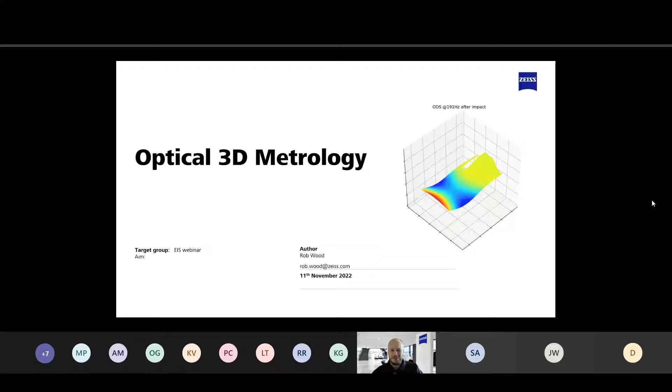Over to you, Rob. Thanks Dave. So, thanks for the introduction. My name is Rob Wood and I work for Zeiss. You may know me from GOM previously. GOM is a company that was taken over by Zeiss in 2019. But as of the 1st of October this year, everything in the UK is now under the banner of Zeiss UK. Apologies in advance, you will see a little bit of a mix match of slides. We're starting off with a Zeiss slide, but very soon we'll go into some GOM slides as well. But we'll come back to Zeiss at the end too.

So initially I want to start with a question we quite often get asked: what kind of measuring data can digital image correlation provide for vibration analysis? That's hopefully what we're going to answer today. Before we get there though, we'll take a step back. For those of you that don't know what digital image correlation is, we'll introduce this. Digital image correlation is one of two techniques that our Aramis optical 3D sensor uses.

You see on the right-hand side a pair of cameras with a stochastic or random pattern that's followed for digital image correlation. We also do some point tracking as well through triangulation. I guess the best way of showing it is to start a video, because it'll show one of the systems in action for some more standard applications.

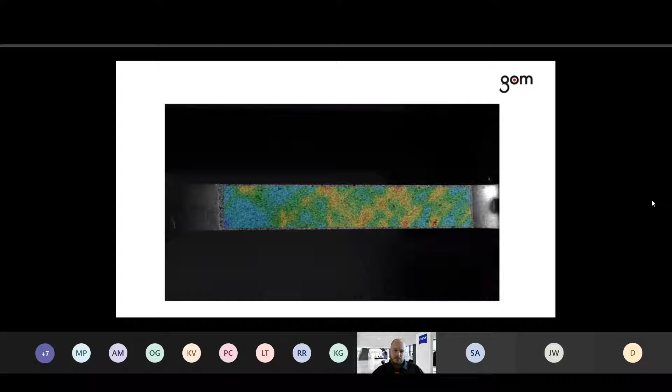So we're going to start off with a materials test, so a tensile test. You see the sensor mounted to the test machine, and when the test machine is started, the camera system automatically starts recording. We've got two cameras with an angle between them and a central blue light projector providing illumination, and that speckle pattern you see on the surface is key. Essentially, we're splitting that speckle pattern into very small measuring facets, or small squares, that we're going to track

through 3D space as the measurement proceeds. This allows us, for example, to look at some flow fronts of strain through the material in the initial stages, and then ultimately look at the failure and necking behavior up to hundreds of percent. In the color plot here, we're looking at full field strain.

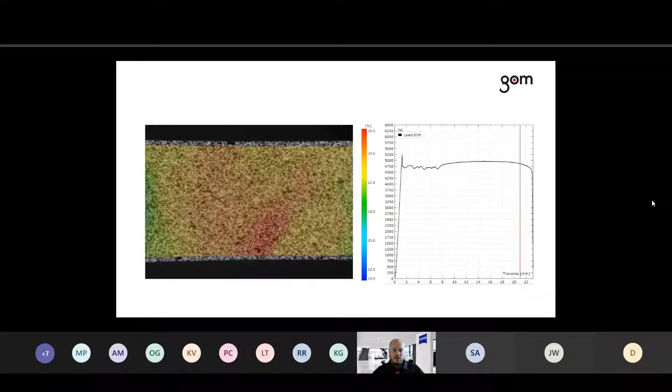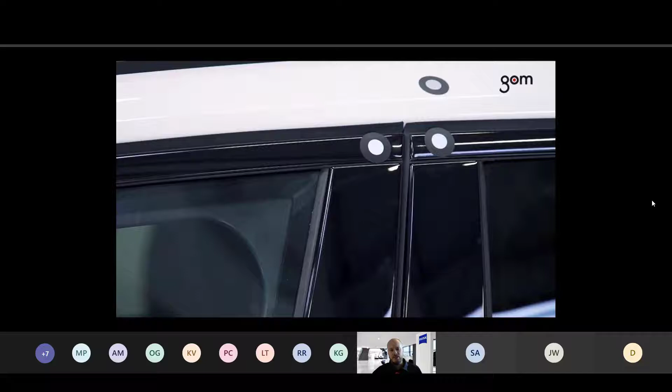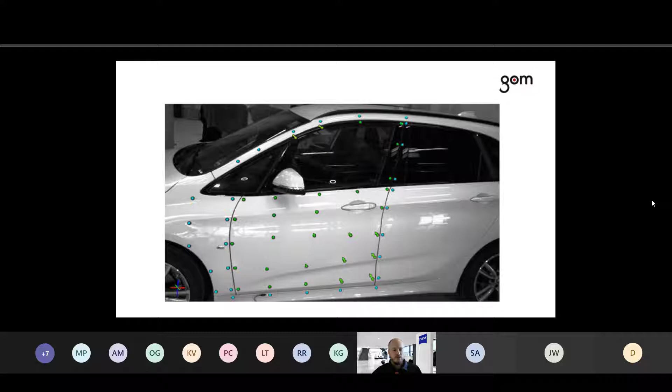That can be scaled up though, being optical. Two cameras, we can change the lenses, distance between the cameras, and the standoff distance, and in this case record at a higher frequency to look at, for example, a door slam test. Here we're looking at how the door performs in an over-slam situation. We're going to come back to look at the door slam in a little more detail later.

Everything we do typically is based on digital image processing, so we're using cameras. Therefore, the measurement accuracy relies on there being a contrast of information, some nice illumination, a good grey value distribution, and good light intensity as well. And that's based on two principles.

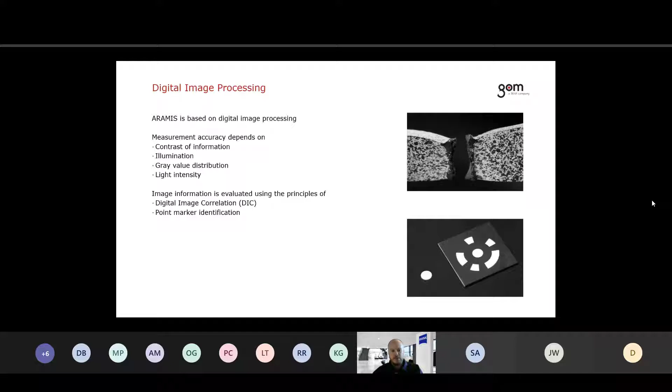So the first measuring principle is this digital image correlation that uses the speckle pattern. I talked about those facets - you can see those here in the picture. The facet is tracked from the top image to the bottom, and you can see in simply 2D here how the facet is twisting and changing shape. So we're tracking that to create the displacement or the deformation of the sample.

The other method uses these discrete circular markers that you've seen on the door slam example, and here we're looking at the contrast between the white and black marker points and using that to pinpoint the center of the point. This allows us, for all sorts of different tests, to generate essentially 3D surface coordinates, and from that we have a reference or zero image, and then we can get 3D displacements, velocities and accelerations back to that, also vibration, which we're going to talk about today, and the surface strains such as you

see in the video. The systems you've seen in the video are standard Aramis systems where we're providing all of the hardware. Typically those will go up to 1,000, maybe 2,000 frames per second. So good for slow speed and some levels of vibration testing.

Where we need to go faster, we would typically have a camera system such as this. So again, still two cameras, but two high-speed video cameras, in this case from Photron, and there's just an additional light because you need more illumination for these sorts of measurements.

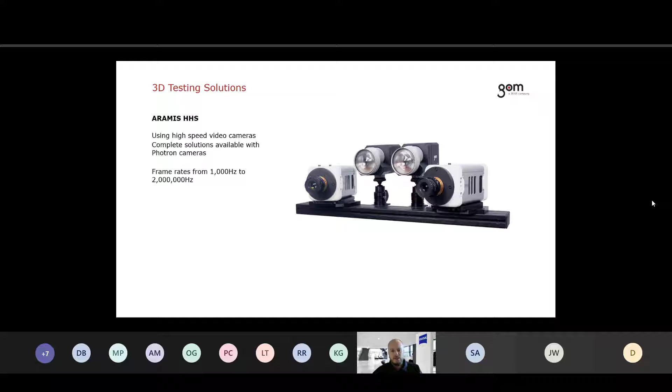So the techniques of digital image correlation as well as vibration, which we're going to talk about today, are widely used. Many different materials, many different geometries, often standardized ISO tests as well can be incorporated. So that's on the material side, and also on the testing of structures and components as well. There really are no limits to where the technology can be used.

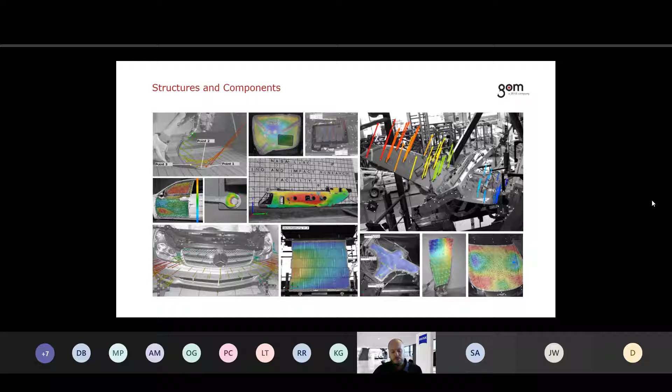And of course, one of those areas is vibration. So today I want to run through a few different applications. The first one is harmonic excitation.

So here we have a polymer component which is on a shaker table, and the system is giving us the displacements that are shown here in this video. The color is showing the magnitude, and in the graph we've extracted data from 2 points on the surface to give this time trace on the right-hand side.

So the test essentially is to validate the calculated mode shapes. Very quickly there you can see the benefit is that we actually get to see how big the displacements are in millimeters.

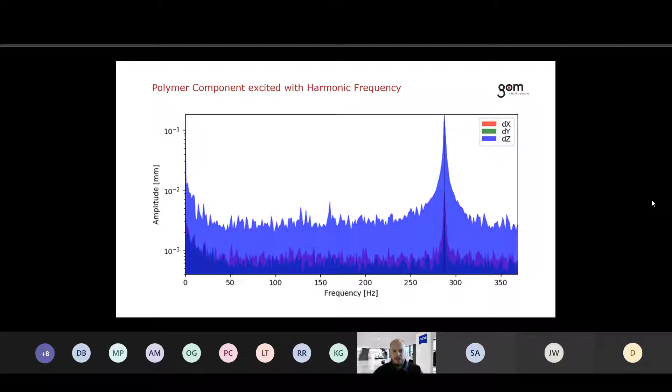So we can extract those 2 points and the displacement in all 3 spatial directions, X, Y, Z in this instance, and then turn that into a frequency response curve, again in all 3 directions. Clearly here we can see a peak at around 287 Hertz, which was also predicted in the simulation, and the amplitude here is about 1/10 of a millimeter at this frequency. From that we can visualize the mode shape as well.

Next example is an impact-based event, the door slam test we looked at briefly earlier, but this time we've applied the speckle pattern across the door itself and the window. We've used the marker points around the edge and the chassis, which gives us our rigid body motion, so we're taking out that twist and roll of the vehicle and just looking at how the door behaves against the chassis. It's a really common test in the automotive industry, used for functionality of the door lock system and seals, and essentially it's a misuse test for the overslam.

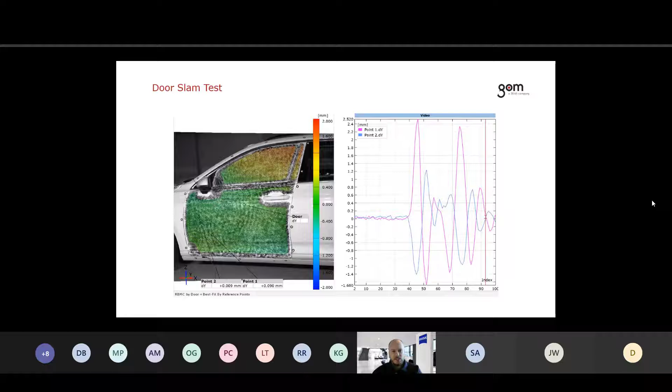That speckle pattern applied across the door gives us very high spatial resolution, full field data points to choose from. On the left hand side we've extracted 2 points, and in the time history plot we've got those displacements in the Y direction, the closing direction into the screen. Again, we can plot displacements in all directions and calculate our frequency response curve and the corresponding mode shapes at the different peaks, starting off and working our way through the different mode shapes and frequencies.

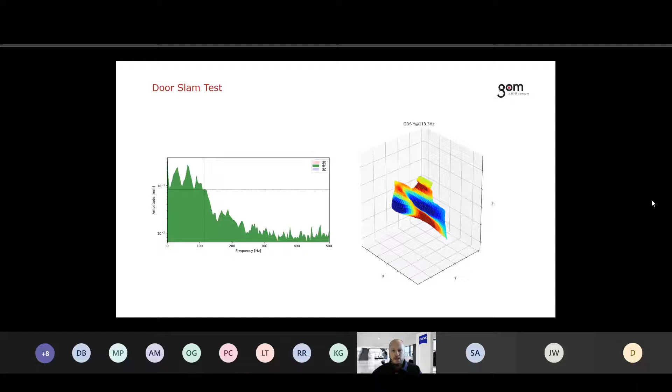Another application we want to look at is a rotating component. Here we see a cooling fan from a truck, and non-contact sensors are ideal for rotating objects. You see the ARAMIS system with its blue ring lights in the background. We're capturing images at 1,000 frames per second, and the ARAMIS system is able to calculate the position of the rotating cooling fan, creating components to track representing the complete component, the hub in the middle and each of the individual blades.

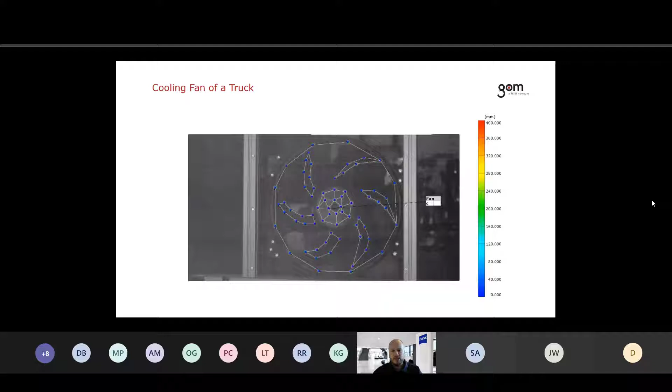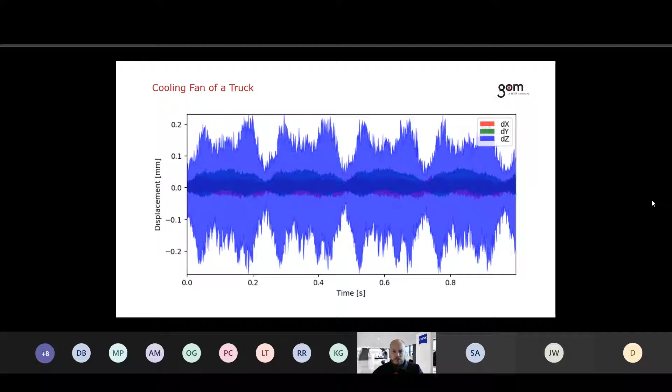This would be a typical video showing the displacement. We can take that relative to the hub as well, so we can really start to look at how the blades are fluttering. Again, we can extract the deformation in all 3 directions, calculate the frequency response, and look at the mode shapes. In these examples, you see an in-plane rotational deformation on the center image, and on the right-hand image you see that out-of-plane deformation, really showing the wobbling of the blades.

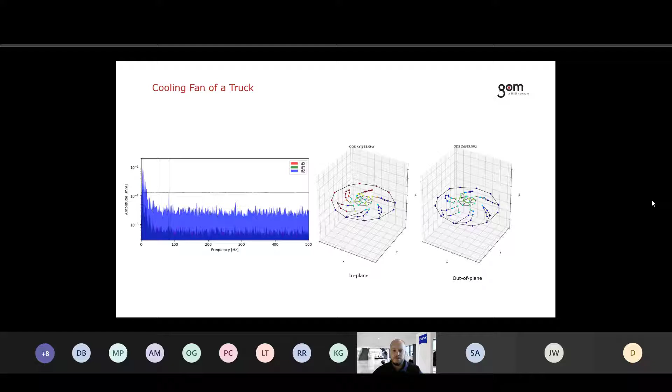So how did we get from the start to that? Looking at the process within the ARAMIS system, first of all you need to set up the system and apply some points. Points are typically easier to apply on structured parts, or sensitive parts where adding additional mass would be damaging, so you can quickly put on sticker points such as you see in the image. The full field speckle pattern can also be applied through spray paint, giving better accuracy but also higher data density.

You then need to choose which frequency you're going to measure with the cameras. Obviously you need to go at least 2 times the maximum frequency. Typically for dynamic events, we would be recording at 10 times that frequency. With a simple harmonic excitation, such as in the first example, we could do some subsampling here, so we don't need to record as fast. In some situations, we can stagger that recording process to build up, assuming it's a harmonic excitation.

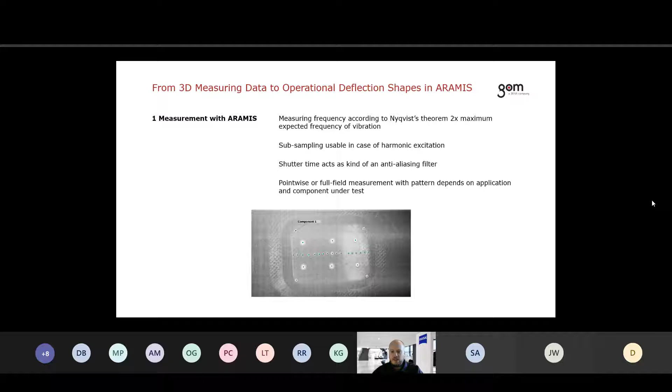Once we've set up the system, we need to acquire some images, and then essentially most of it is typically done in post-processing. We create this so-called point component or surface component, depending on whether we're using points or the complete speckle pattern. We can transform the measuring data into a defined coordinate system to define our X, Y, Z directions, apply any rigid body motion compensation, such as the roll of the chassis shown in the door example, and then check for displacements.

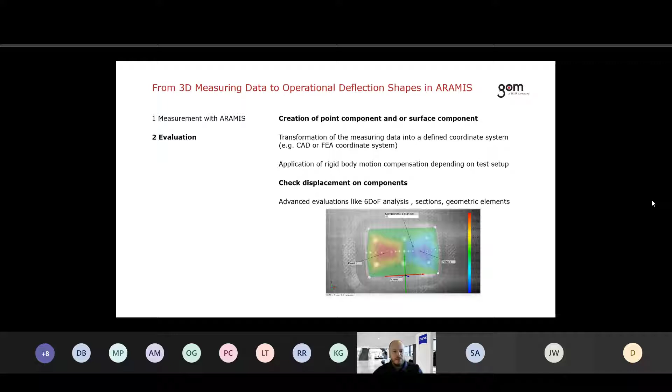There's obviously lots of other analysis that can be done, such as 6-degree of freedom analysis as well. At that point, essentially we're finished with how far we take the measurement within our software.

At this point we would export typically a UFF file. This would contain the signal, the geometry, mesh, surface - all of the information - into this common, as the title suggests, universal file format. This universal file format is supported by many vibrational analysis tools that many of you will be using already.

We've got documentation and workflow available on how to link this to ME'Scope, BK Connect, and PAK and NumPy as well. Another example of the different software that's supported is Siemens Test Lab. That's a nice throw forward into the webinar a week on Tuesday on the 22nd from Siemens - if you're interested in the vibrational analysis side, please register for that event.

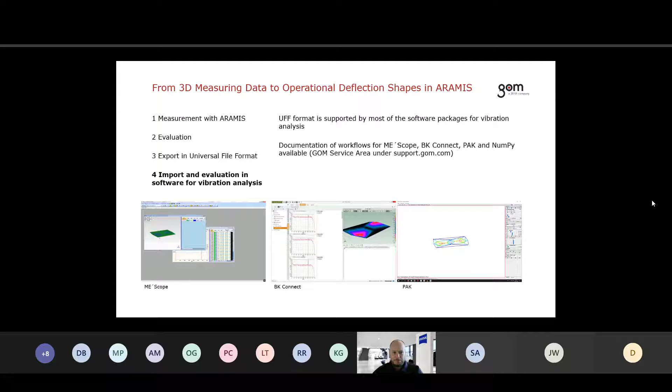Okay, another couple of examples with some nice videos. This is turbine fan blade inspection using the Aramis system. Typically this is used in aircraft maintenance, repair and overhaul, or MRO, where we're looking for cracks in these large fan blades from the jet engine.

If you have cracks that are already initiated, the natural frequencies of the component will change. So by doing this non-destructive test at the beginning of its life and during service, you can identify the possible determination of cracks or maybe other internal problems or faults.

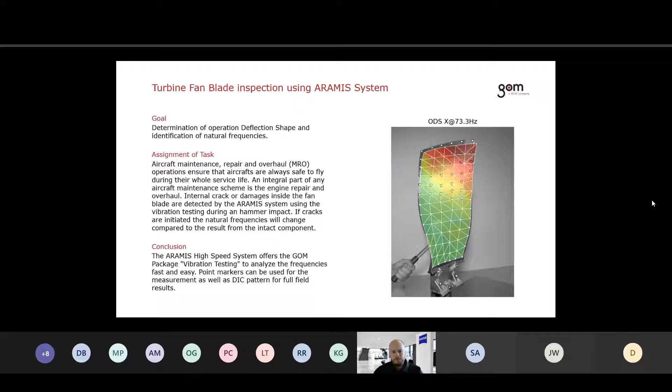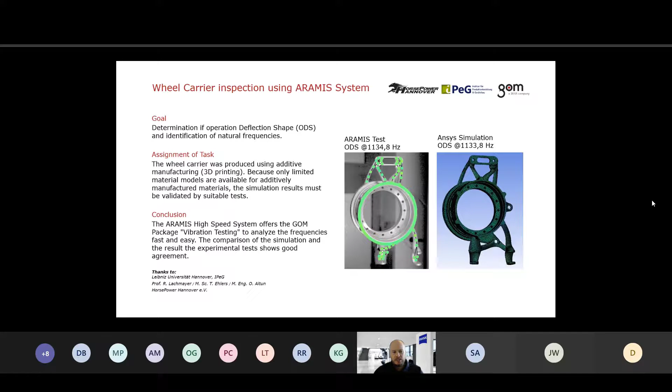The next example here is looking at a 3D metal printed part, and with these sorts of materials and production processes, there's not too much widely available material and proven simulations. So here we're using the results from the Aramis to validate our ANSYS simulation for the mode shape calculations.

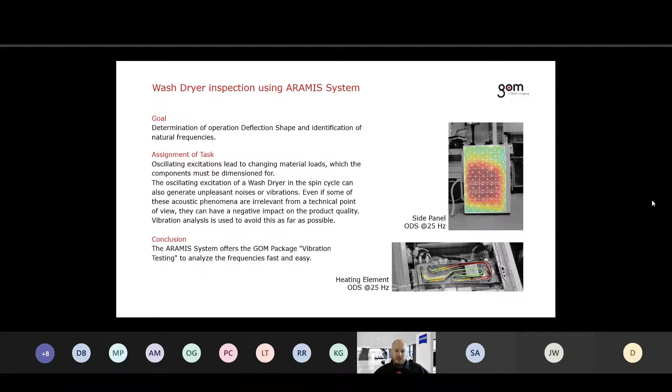And the final example, hopefully many people can relate to, is just a simple washing machine. There's various things to consider - during the spin cycle, the washing machine is going to generate potentially unpleasant noises or vibrations, which we don't want. From an NVH point of view it's very important to understand, but also from a product quality point of view, since we need to understand how these vibrations can impact the overall quality of the machine. You see the two examples here with the side panel vibration and the heating vibration.

Okay, hopefully you've seen many examples and benefits of optical 3D metrology for vibration analysis. To sum up, basically it is a non-contact measuring principle. In terms of setup, there's no wiring needed such as with accelerometers, so it's really fast to set up and calibrate the sensor - we're reducing it down to minutes, where typically on a large test you could be working for days or even weeks to set up accelerometers.

The markers themselves are very lightweight, so suitable for applications where you don't want to add mass to the structure, but they're also durable, so the same sensor and measurement points can be used again and again for many different tests. Clearly the amount of data you can get is quite large.

Even with the marker points, you can stick hundreds of marker points on, and with the full field speckle pattern you're getting thousands of points. Importantly, each of those points is a 3D displacement - so if we're putting one sticker down, you're getting the equivalent of a triax accelerometer.

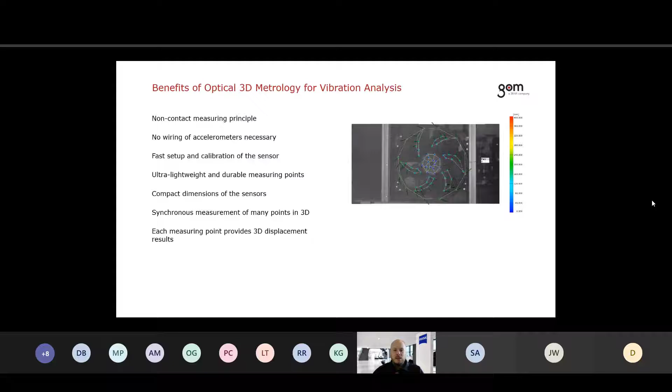We've also seen some applications of rotating components, much simpler here because we've not got any wiring. Other things to consider around the whole test is that we can actually measure the excitation as well. We didn't see any examples of this, but if the excitation is in the field of view that the cameras can see, we can put marker points on it to measure it, or we can bring in analog signals from the excitation source and sync that up with the measurement data we're collecting.

All of this can be done in real time as well to provide real-time digital outputs of the displacement. And finally, as we've seen in that final example, validation of FEA is another area where this can be applied - we've got techniques for bringing FEA into the software and doing a real direct comparison.

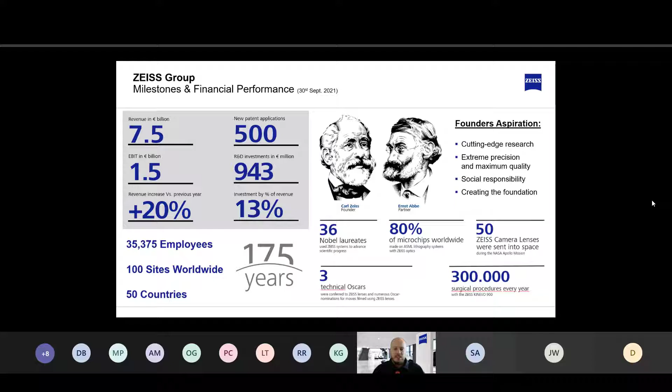It's been around for 175 years, founded by Carl Zeiss and his business partner Ernst Abbe. Really, their aspiration of cutting-edge research, extreme precision and maximum quality still exists within the foundation they've created today. So today, it's split across 4 main segments.

I admit I didn't know some of these applications when I started with Zeiss, but the first one there is semiconductor manufacturing technology. So 80% of microchips worldwide, from your phone to your car, are all manufactured using an ASML lithography technique, which relies on Zeiss optics.

Jumping over to medical technology, so 300,000 surgical procedures are performed every year using a Kinevo 900 surgical microscope. This is typically in brain surgery and other complex surgeries.

And then maybe the one that most people know the brand or name Zeiss for is in consumer markets. So here we're talking about binoculars, hunting scopes, glassware and eyewear, and also camera lenses. Within this area of the business, 50 camera lenses have been sent to space as part of the Apollo missions.

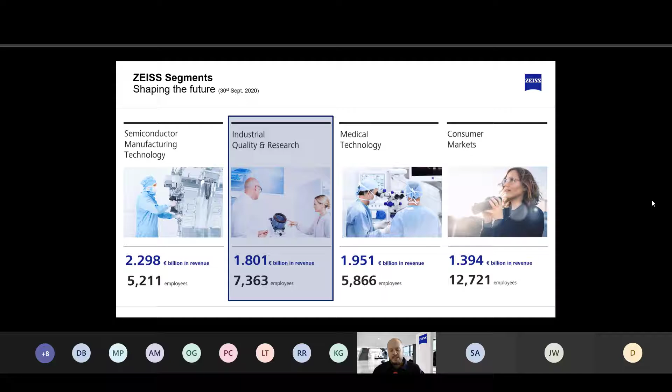And then the final one, industrial quality and research, that's where I sit and where the products we've talked about today sit. In that division, there are 7 different business units or areas.

There's traditional multi-sensor CMMs - your traditional tactile CMMs and optical-based CMMs. There's also optical systems, a lot of the technology from the former GOM companies. As well as the Aramis system we've talked about today, there's also 3D scanning capabilities.

Other areas of measurement include X-ray, so 2D and also 3D computed tomography X-ray, and also industrial microscopy solutions involving a whole wide range of microscopes, from simple light microscopes up to scanning electron microscopes and beyond.

Everything obviously needs to be underpinned by software, so Zeiss is a little unique in providing both software and hardware solutions, enabling you to make intelligent decisions with your data. And finally, the last 2 areas are solutions - delivering a complete off-the-shelf automated solution - and also services, be that contract measurement services or application on-site support.

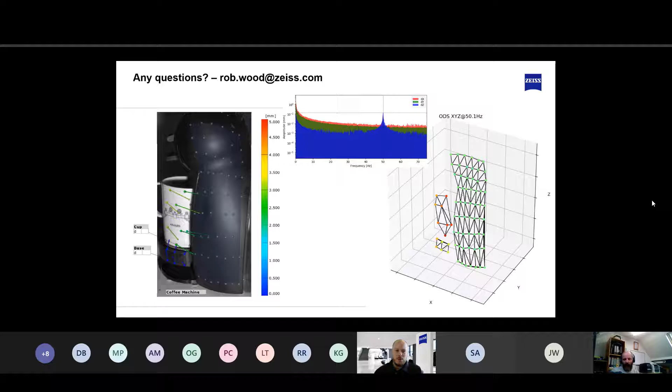Possibly, let me see - this one. I'm not sure if there's a further question beyond that.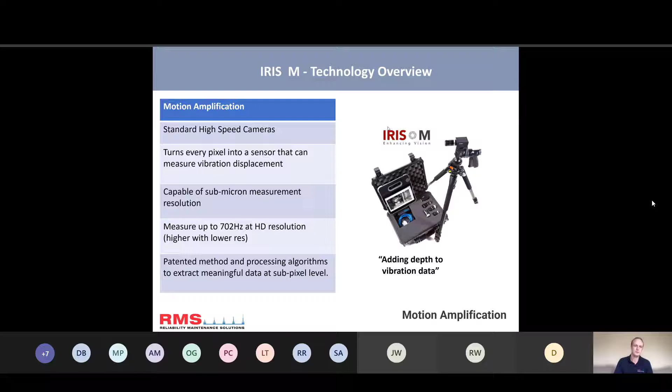We can measure up to 702 hertz in HD resolution. We can keep going much higher, and that depends on the camera you've got connected to the system. We can take in with the RDI family of cameras up to 29,000 frames per second, but we can also plug in Vision Research cameras and Phantom cameras. As long as they're mono, they'll work with this system, and you can then get much higher frequencies and higher quality at those frequencies. So essentially this technology turns each pixel into a vibration sensor.

So we're measuring within each pixel the displacement that we can see on the object we want to look at. You'll see here a few videos. We like to show a normal video and then show the amplified measurements video. So you've got a normal video on the left here, and that's the same video on the right hand side. We've just taken all the measurement points and amplified them, multiplied by a certain factor. We go all the way up to 500.

So my background is more in rotating equipment, but I've got a nice variety of case studies here to share with you, and I've also got a bit of a live demo I can share.

So the idea of this technology really is opening our eyes up to really seeing what else is happening on the machine, the product, or the parts you want to test. Because each pixel, if you think the camera we're using today is a 2.3 million pixel camera, each pixel becomes an accelerometer essentially. So where would you put that many sensors if you could? We don't need to put any patterns on the system, the product or the object we want to look at. We just need to put the camera in front of it, get good contrast across the image, and then record, and we've got good data.

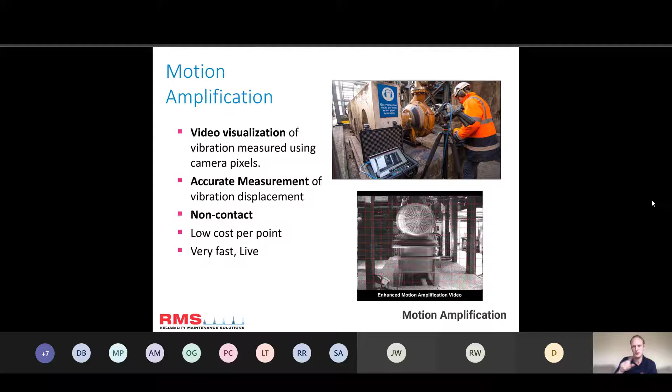So again, no contact. We don't have to go and attach anything. We don't have to put accelerometers on there. We don't have to put any speckle patterns on. As long as we've got that nice contrast, we can get good vibration measurements from anywhere on that image.

So it goes from the point by point sort of visualization, looking at the spectrums, waveforms, trying to understand the mode shapes, maybe building a model. Now we can just look at it in real time and fill in all those gaps.

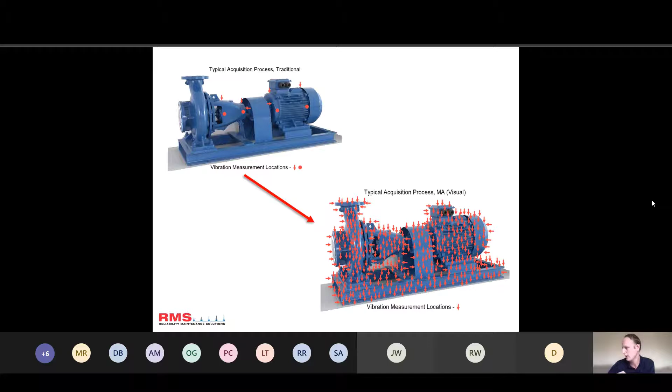So I'll just quickly show you a live version of the system from my lounge. Can you give me a shout, Dave, if you can see my screen? I can see the screen, yep. Okay, so now I'm just going to try and do a bit of a live demo.

So I'm just going to tap on the box there. We can hit amplify live, and all I've got in there is a little fan with an unbalance on it, just to give a bit of vibration, just to show how quick this system is. Bit of a delay on my update there. Let's bring that up.

The great thing about the technology is, as it updates so quickly, we can make changes and see the response very quickly. I'm even going to put an Aldi catalogue, my wife's special Aldi catalogue, on there and see how that affects it.

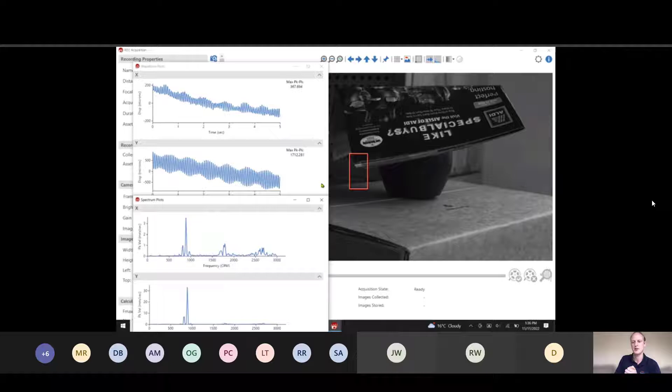Great stuff. So if I take that off now, I can also measure live. I can just draw a box. We call these ROIs, regions of interest. What the camera's doing, it'll take its averages across all that box, so all the pixels within that box, I'll get an average vibration measurement from that, a waveform and a spectrum. I can redraw that again if we want.

Just as long as we've got the contrast, it'll get an accurate measurement. The other thing for our accuracy, for amplitude accuracy, is that we need to put in a distance. So the distance and the focal length give an overall distance to the point of measurement. We can add multiple points, so if we've got some depth to our image, we can tell the system that this pin here is, let's say, 5 meters. We can add another one and say this one is closer to us, maybe only 1 meter. That way we can get multiple measurement points, still maintaining that accuracy throughout the image.

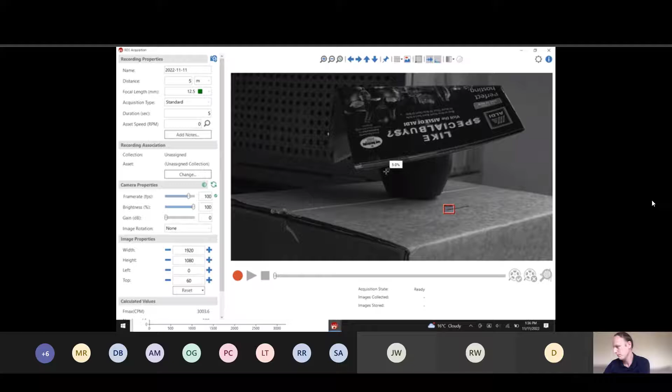So really easy to set up, as you can see. Nice quick live demo. If you've got any questions, throw them in the chat, I'll try and answer them as I'm going through this, but I'm going to start looking at some case studies now and show you some examples.

I really like this one. The non-contact aspect Dave touched on earlier is really interesting for test measurement, because for me one thing is the observer effect. If you've got a really lightweight product or component that you want to measure, when you add an accelerometer onto it to measure and test that product, you're adding weight and you change the dynamics of that structure.

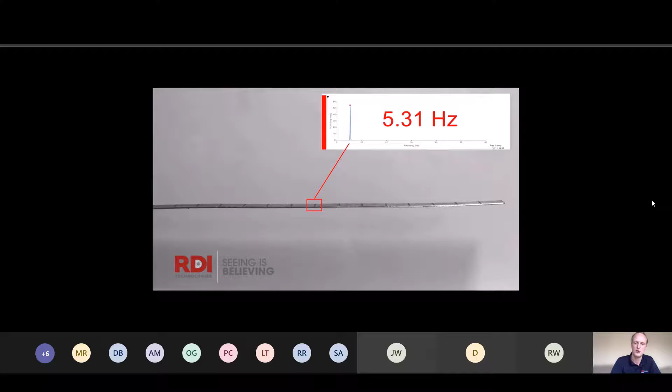A really nice feature of this non-contact vibration approach: the other side of it is we're filling in all those gaps. We're not putting sensors in specific places, we're actually just putting the camera on, filming the whole object, and you can see an awful lot more. Once you identify areas where there's more vibration or a certain mode shape you want to look at, you can zoom in, change the lens, move the camera. It's very agile, you can just pick it up and move it, then zoom into certain areas and hone in.

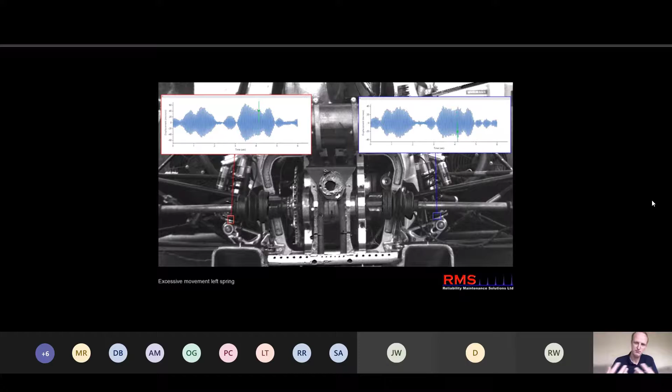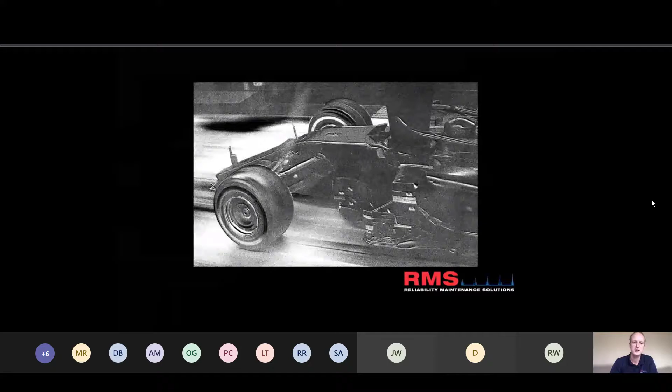Another feature of this technology that's really good, because it's vibration, we can add filters. We can get raw data that looks not that great to look at - we're not getting a lot of feedback from that. We can take measurements from there, and once we've got our measurements, we can filter it. So this one's at 12 Hertz bandpass, and I've called it porpoising - I don't think it's the same porpoising that's going on in F1 at the moment. I think this is just the tire deformation, but you kind of see the point in the filtering.

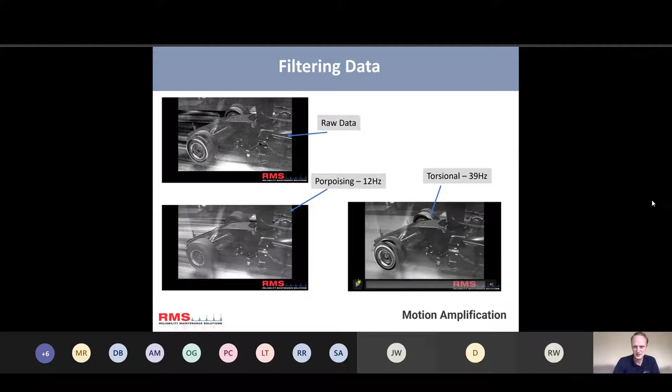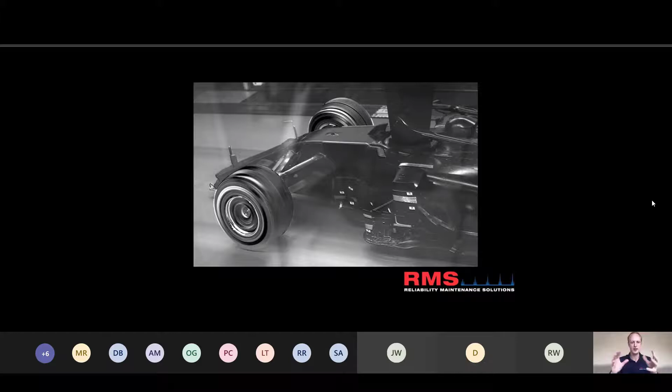Now at 39 Hertz, you can see that twisting on the body. That real simple feature from a vibration aspect is phenomenal, because I can look at a big area and say, well, all these different frequencies that I'm seeing, what's reacting at that frequency - I can just bandpass to a certain frequency and eliminate anything else at other frequencies, and see each individual part that moves at that specific bandpass that I want to see.

So ping testing, or impact tests, to see a natural frequency - yes, we can take a measurement from that as we do it. This is a fan inside of a fan on a polyester plant. This is where the shaft is, just here, and this is the fan blade, and inside there is the impeller's vanes.

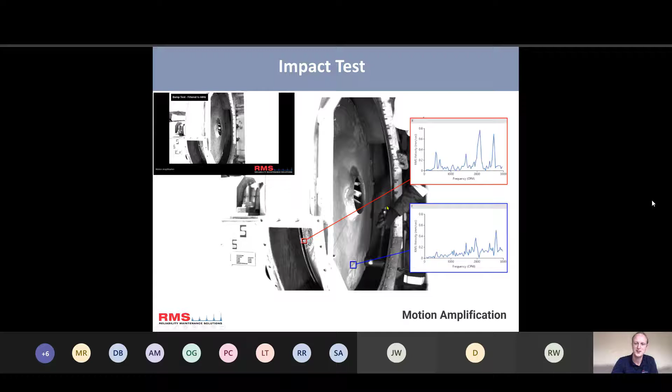So my colleague here has got his hammer to bump it, his modal hammer, not connected. Play it back, visual side of it. This is filtered to 44 Hertz, where we saw that dominating peak there in the spectrum, and this fan runs at 49 Hertz. So you can see it's very close to its natural frequency, and we're going to get these mode shapes while it's running.

Another similar application, much larger machine. This is on a shaker screen that's used in a lime kiln plant, so where they have to shake the stone into the kiln. When we add the stone as mass, we take the stone away, obviously the machine's lighter, and the natural frequencies were changing.

So here with the bump test, we've got 23 and 28 hertz amplified. There's not an awful lot to see. This direction's much better.

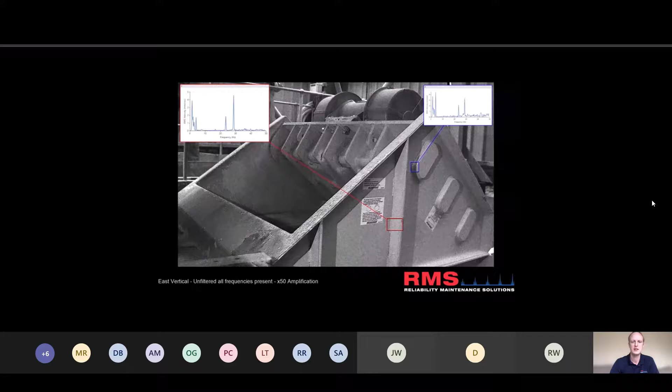You can see the lower modes there from the AV mounts. Now this is adding the mass with stone - we get change in our natural frequencies.

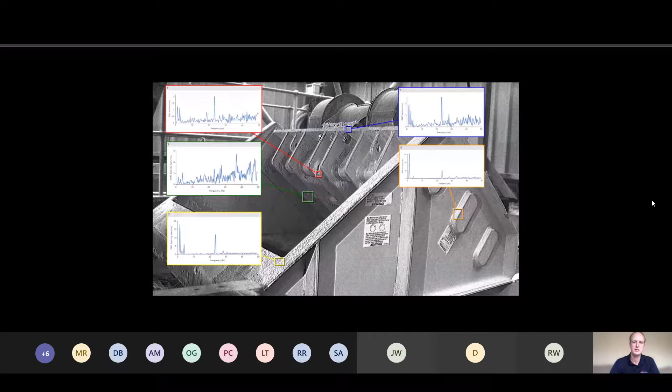So again, we take measurements anywhere on there. If we do want to mark it up to improve that, we can do with some paint markers or stickers. So that's the 16 hertz - we didn't see an awful lot.

At 23 hertz, you can see all this twisting on the machine, amplified up to 50 times. And the fault on this machine - they had the shaker motors above were breaking the machine, they were flying off the shaker motors. Those motors were running at the frequency that we just identified there, or just close to it, within 20%.

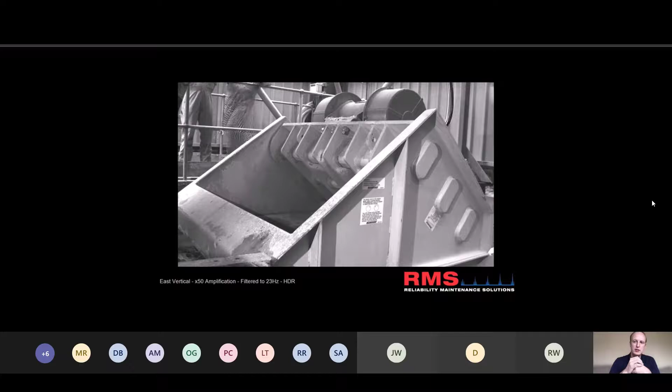So there's some other little features within the software which are really handy, which are really nice. Sorry, this is not full screen, this one.

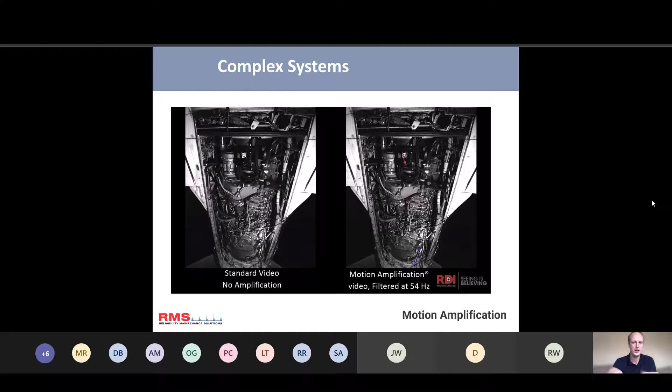We can look at a large complex machine, lots of components, like we said there, amplify the whole lot and filter for different areas. And within the system, we can draw those ROIs and extract specific areas of spectrums for those areas.

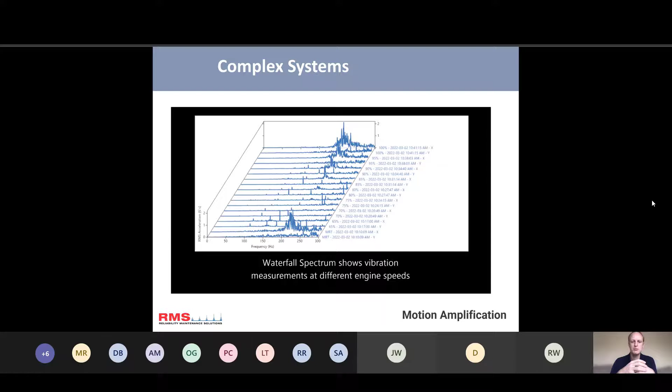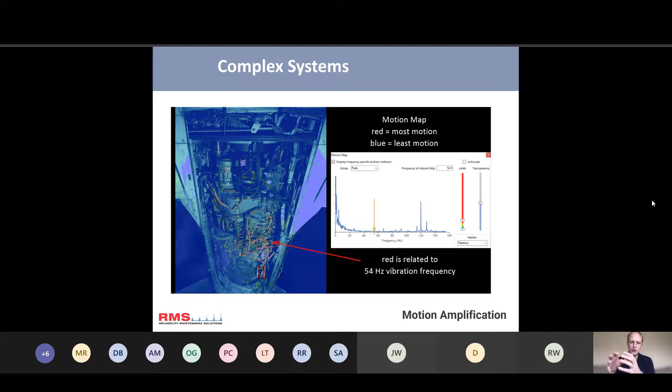But we can also do what we call a motion map, and it's like a heat map of the highest amplitudes and different frequencies - that's this one here. So it highlights certain areas at different frequencies. You can then filter for them, look at just those frequencies. So it's a way of scanning complex areas a lot quicker by building that power spectrum we've got there.

Some rotating components - we've got a new application that's really nice, we call it tach sync. What we can do is, with some tach tape on a moving rotating part, we can use a tach pulse to fire the camera. So you can just see here the line out from the tach goes into the back of the camera. It doesn't matter which direction the camera's in, as long as we can see the area that you're interested in - we can change angles and so on.

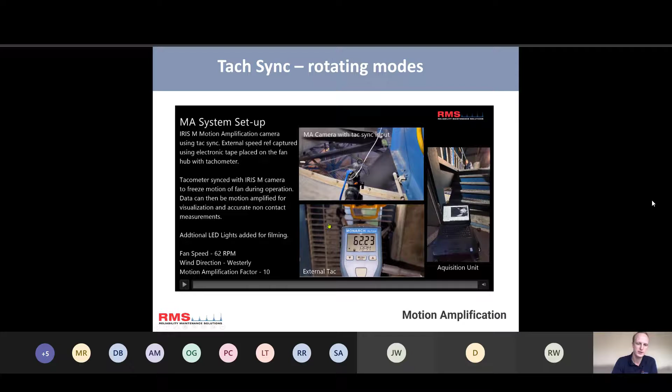That feed will be firing the camera from the tach. Every time it sees the pulse, it'll fire the frames, so your sample rate becomes the 1x - it becomes the speed of that shaft. So you can see mode shapes that are around the 1x, anywhere that's close to the 1x. So rather than me waffling about it, let's have a watch of the video, because it is quite good.

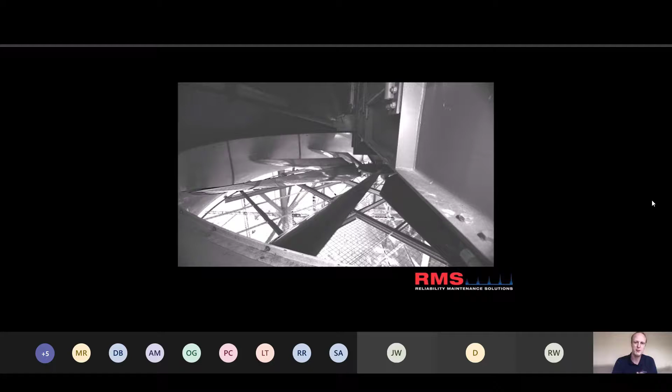So that is a spinning fan, and we've frozen it like a strobe, but we've done that with the camera. And because we've got this measurement capability and amplification, we can amplify that, and we can measure points on them.

So this one's pretty good, this fan. This is a new design, and I'm going to show you in a second the old design where they had problems on the fan, and it was causing cracks.

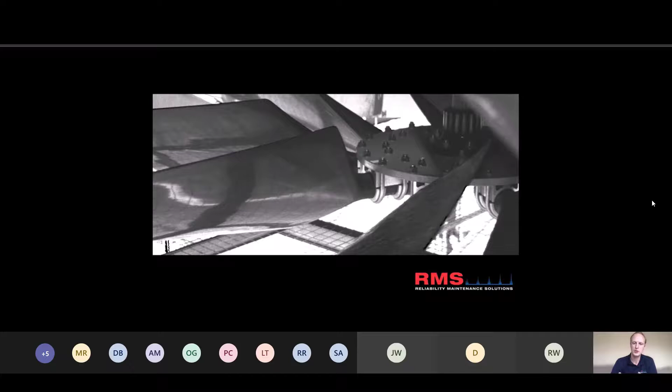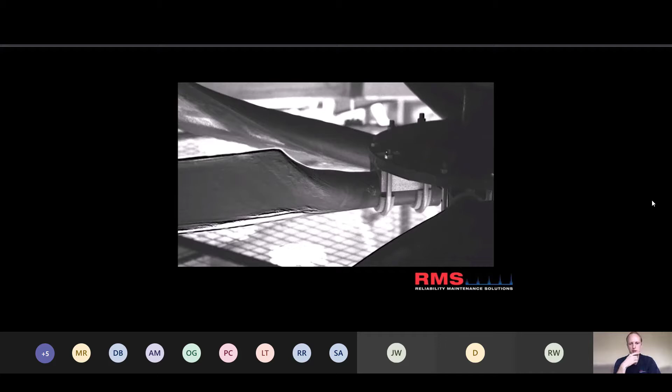So this is the old design - you can see immediately more movement. So by zooming in, improving resolution, you can really hone in and see how that motion is on right up close to the hub, the fan, and it starts twisting on the shoulder there - that's where the cracks were on the fan.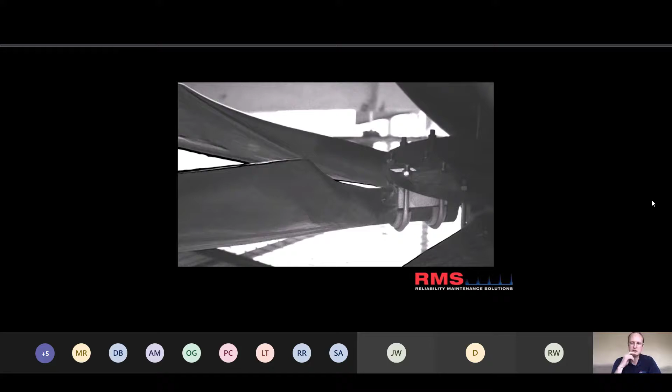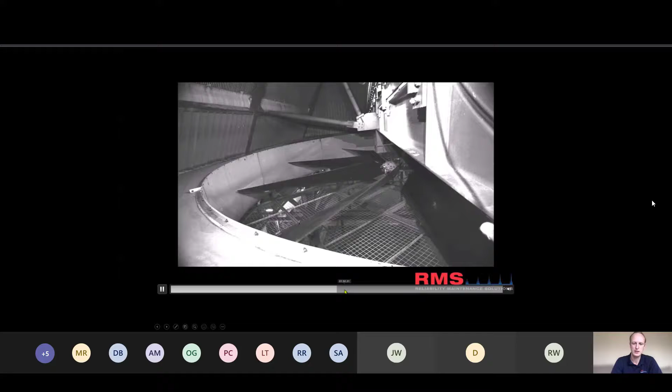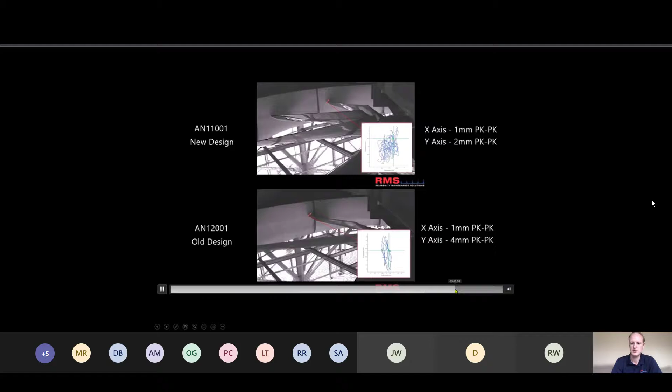There's one that's had strain gauges on. Okay, another new design. If I just skip along, should have some images of the damage. Yeah, so you can see there the cracks on that area play into where we're seeing them.

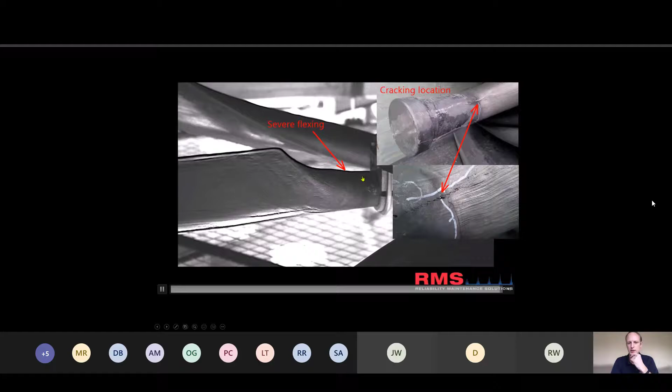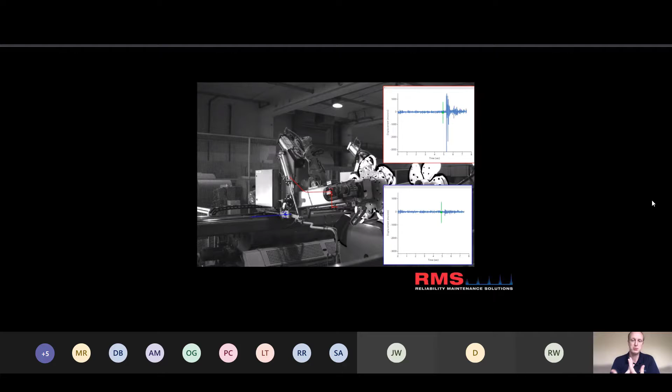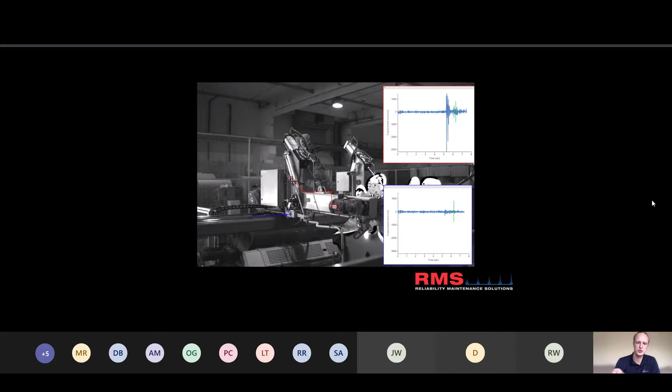We can also do some of the more traditional motion tracking with camera. We can pick a point, allow a transient event to happen, and track that event as it moves through the image. The plus side of using motion amplification is we can also extract the vibration from that point as it moves through the image. So we get both that overall displacement, but also any vibration displacement within the point as it moves. We can then add amplification like you see here, and it shows you the stresses on the machine.

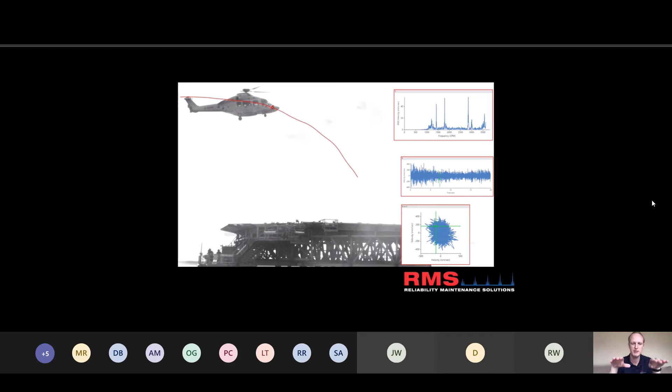Again, another example of that. This has got the tracking of the helicopter as it comes in. This is on a ship, so if you look to the bottom left, you can see the sea rising and falling. We can track that displacement and grab the vibration out of it. We've got the rotor, the blade path, and the tail rotor on that spectrum in the top right.

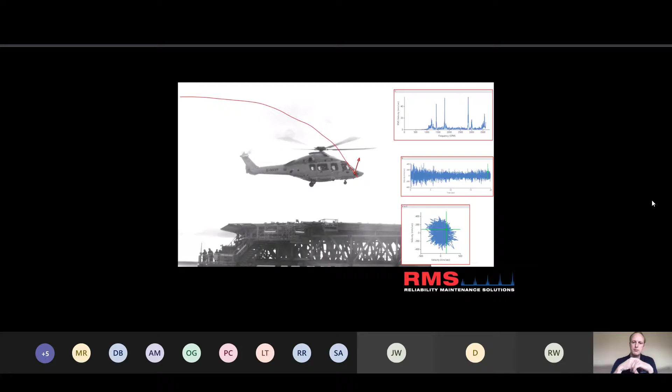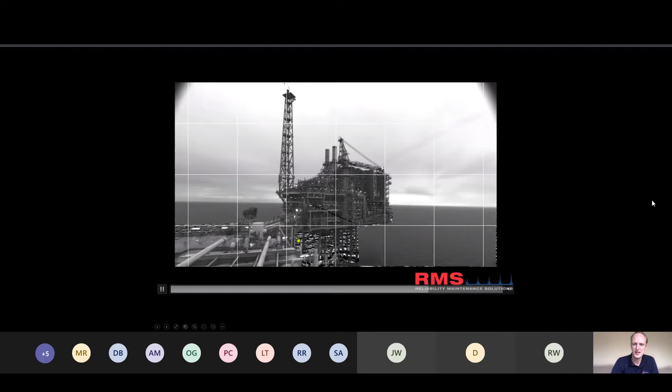So it's not just smaller structures, we can do large structures too. Not amazing amplification here, but just to show you that if there is movement, we can amplify it. We've now got much better algorithms in the technology to enhance this - I could probably improve this a bit, this is an oil rig. Once it gets energy from the waves, it does shake a little bit, and I think there's also a helicopter just there on this one.

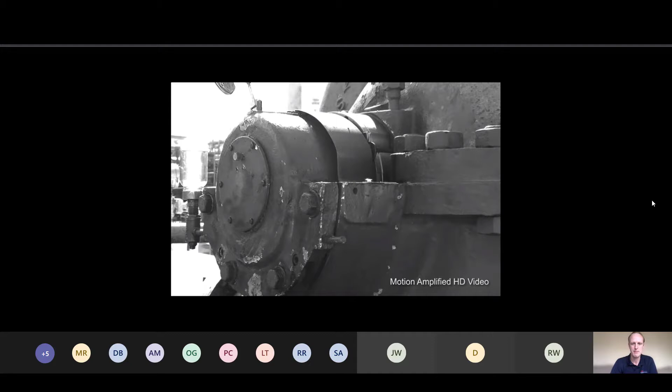On rotating plant, like I say, that's more what I'm used to - on a big pump at an oil refinery. This is a bearing that had poor machined housing, and it shows how you can really see the forces on that machine. Really highlights it on this video. It's a nice one - they had repeat failures due to this bad machining.

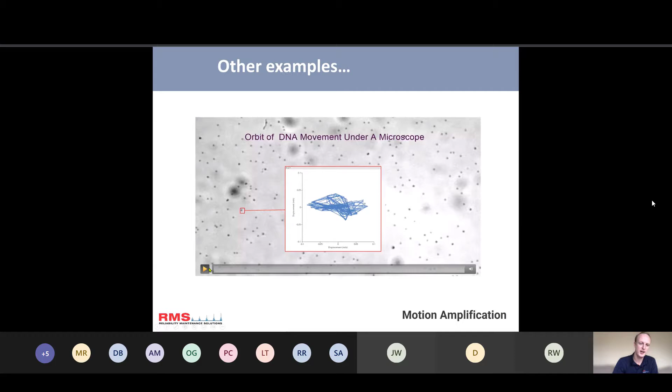So size-wise, we can go straight down to really small sizes. This one's got nothing to do with the rest - it was given to me from RDI. I didn't know that our DNA moves like that under the microscope. But because our cameras, the Iris M, are C-mount, and a lot of microscopes are C-mount too, you could mount this camera on a microscope if you wanted to, like this.

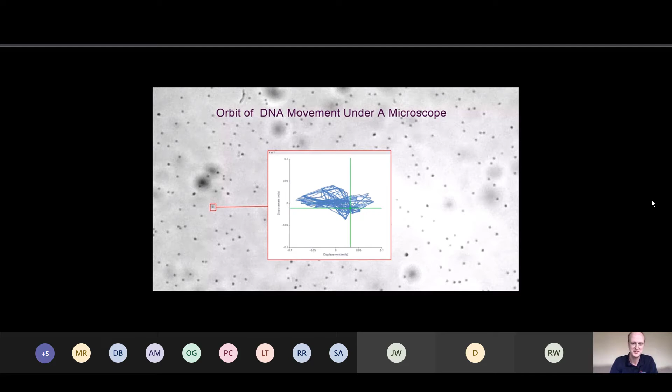Yeah, so that's it for my presentation. I've got time for questions. Hopefully I didn't speed too quickly through it.